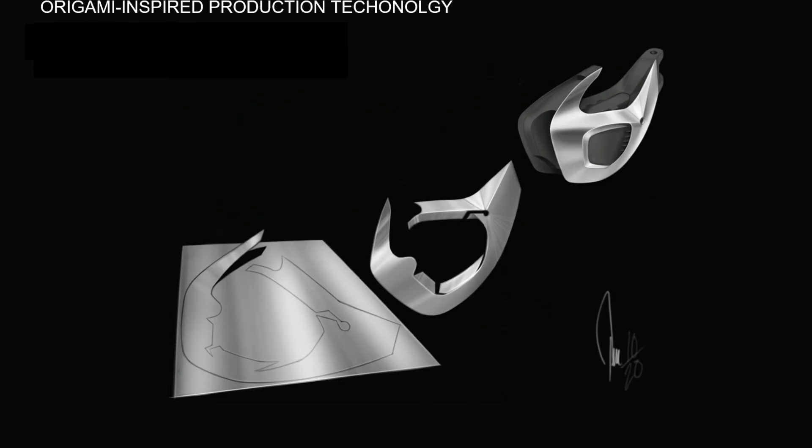And what we do, we call an origami-inspired production technology, which we envision more or less something like this. We say origami-inspired because we are folding. We take a sheet of material, primarily metal, and we fold it into shape. And we draw a lot of inspiration from traditional origami and origami research.

In some of our communication, you will see that we call it industrial origami, and this is to communicate that we are targeting the industrial scale and that sort of level of automation. However, some people who are really into origami know that you are not supposed to cut sheets when you do traditional origami. And do we cut sheets? Yeah. We are making functional products, so obviously we give ourselves the freedom to cut them. So if you're going to be theoretical about it, it's sort of more like industrial kirigami.

And for us, everything started with this. This is Stilride, which is an electric motorcycle. And this was made during the early days of this company, which is now Stilfold. And the Stilride is an electric motorcycle, and therefore you obviously want to be able to go a really long distance on a single charge. So you want a large battery and a low weight. And you still want sort of a streamlined shape to it, since you do not want to take up too much wind resistance.

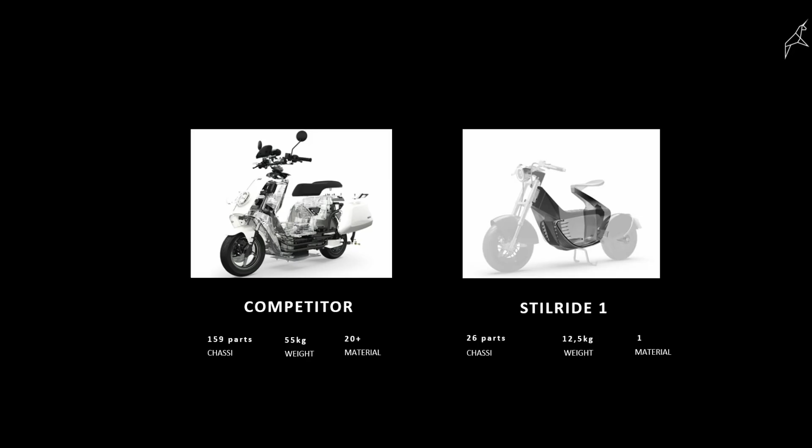So the idea here was that the chassis should be both the supporting structure and the external structure. We did not want to have an internal structure and then a cladding on top, because we wanted to have more space inside. So, in doing so, we realized that we could actually lower the amount of parts quite a lot. And of course, also, it was relatively light, even though it was made from a premium material. And yeah, the whole chassis is made from one sheet.

We made several versions of this bike, and this is the latest. And you can see that the refinement of the chassis has improved, and that is because alongside the bike, we started to develop a production technology. Because at that time, there were obviously a lot of other techniques to shape sheet metal, but none that really fitted our purpose.

Because you have traditional workshop craftsmanship, where you have people just hammering away at metal, which is great if they're good at what they do, but the level of automation is really low and it's not really good for production. You also have really good straight folding techniques, but they have a very limited form solution space.

And you also have sheet metal stamping, which is really good, has a really large form solution space, but it's very cost intense. It takes a lot of energy, and therefore it's very high volume prone. And it's because you need to make a mold for every stamping, and you need to have access to a really, really big press.

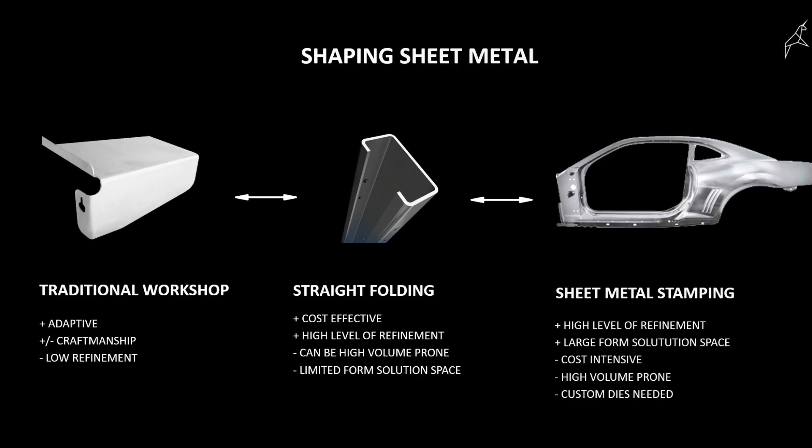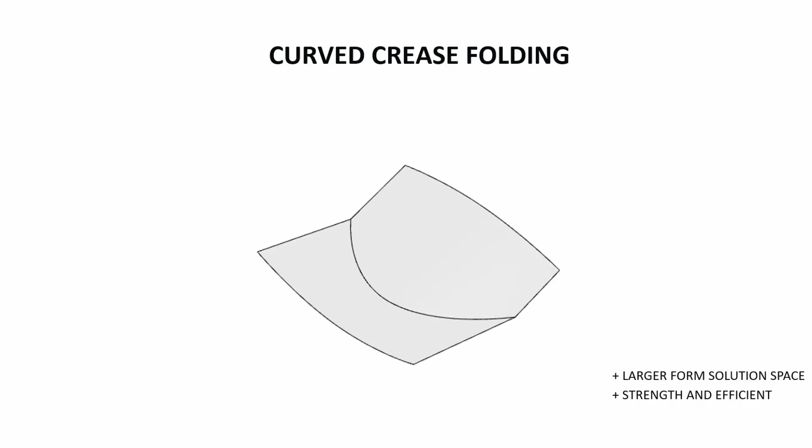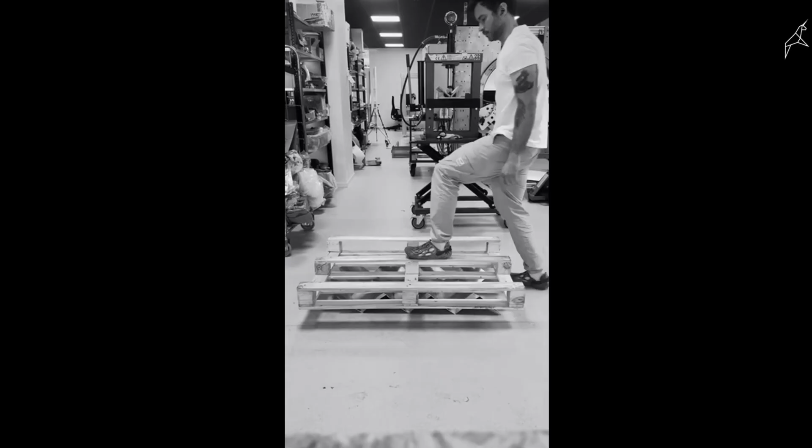So we started looking into curved crease folding. Curved crease folding has been explored in research for quite some time now, but it has had some difficulties making its way into the industry, because there are some tricky parts to it. It, however, has several advantages. Curved crease folding is exactly what it sounds like. Instead of folding straight, you fold over curves.

And when you do that, you actually also get some strength to the material. So here's our industrial designer, Ricardo, who is jumping away at a sort of wavy curved structure of 1.4 millimeter aluminium. You also get its own design expression when you're doing this, which sometimes is good for external surfaces.

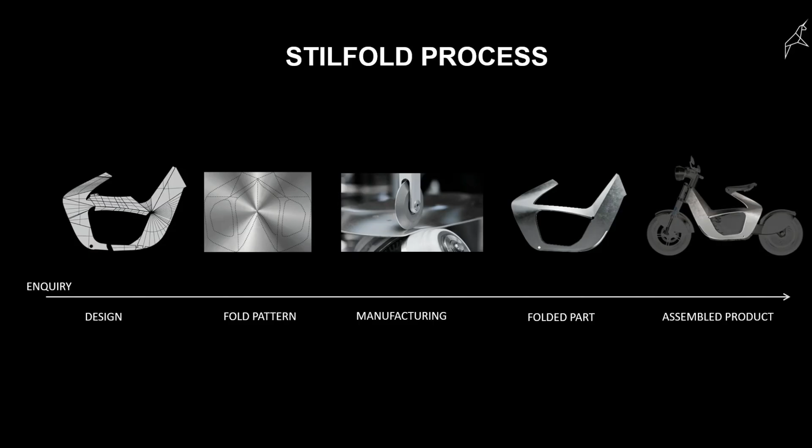And if you sort of squeeze a bit, you can say that our process is more or less like this. We have a digital design, we get a fold pattern, we put it to manufacturing, we get a folded part, and we can assemble it into a product. But in real life, of course, nothing is ever this linear, so we do a lot of jumping back and forth. Especially the first parts of the process we do several times, because we also do a lot of prototyping in other materials than metal before we go into the metal folding.

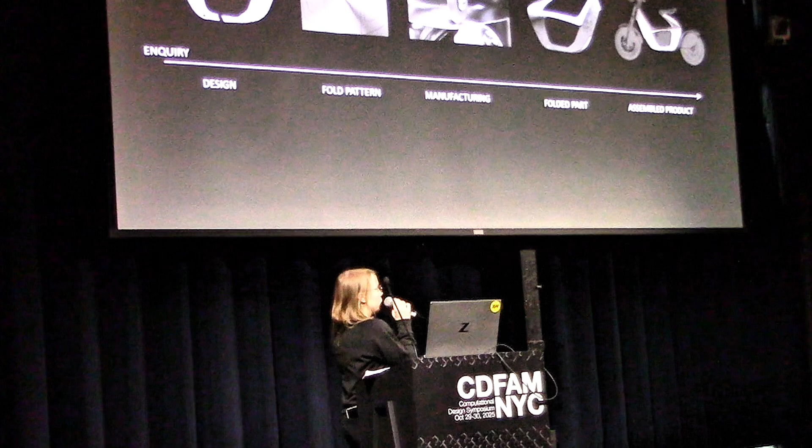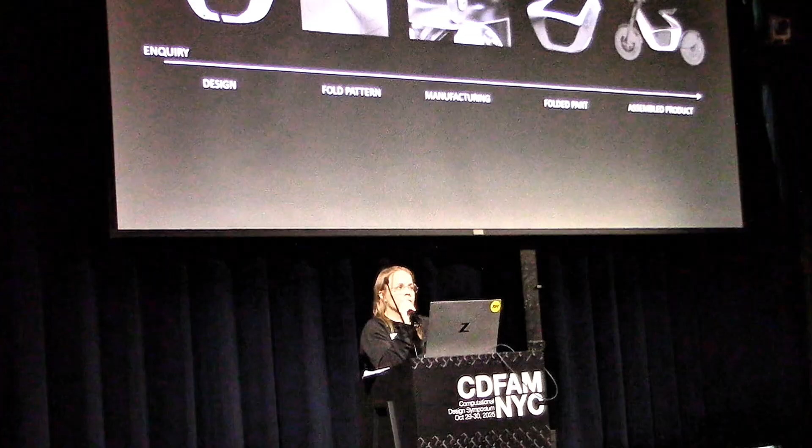What the process looks like also depends a lot on where it starts. Like, where does the inquiry come from? Because we noticed that there are many companies who are also experiencing a gap here. Stilride was our own product, but we have done a lot of projects with other companies, most of them, of course, in mobility or vehicles, but not exclusively. And we also do projects together with research institutions and universities.

We also get some clients who are only interested in our manufacturing technology, and they want to buy a machine like ours, because they have some sort of metal production already, but they want to make them in the way that we do. And we think that's great. Because our long-term goal is not to make a factory located in the north of the world from which we're going to send folded parts across the globe, because it doesn't make any sense.

So we like to consider it more as micro factories. So if other people want to buy your machine, great. And doing so, you can actually fold close to demand. And theoretically then, and this is our envisioned future, you can design a folded structure anywhere in the world and then send it to be folded close to where it's needed.

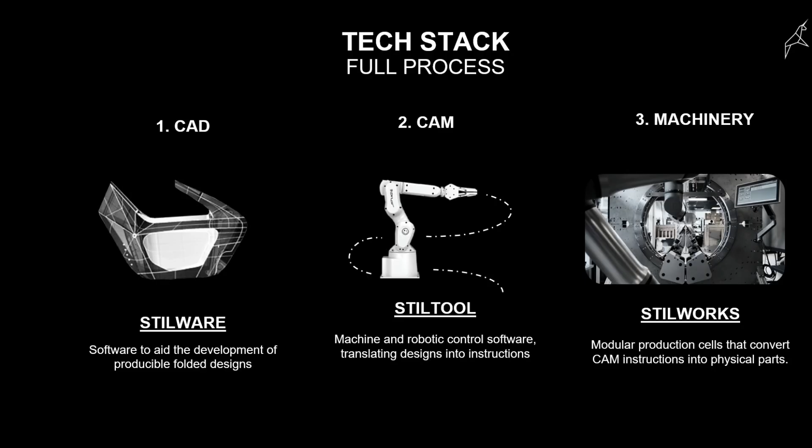However, for now, we are doing most of the process ourselves. And to be able to achieve this process, we had to develop tools for every step of the process, from CAD tools to the actual machinery to fold stuff. Because what you have to start asking yourself is, how would this look folded? Or, what does this fold pattern look like?

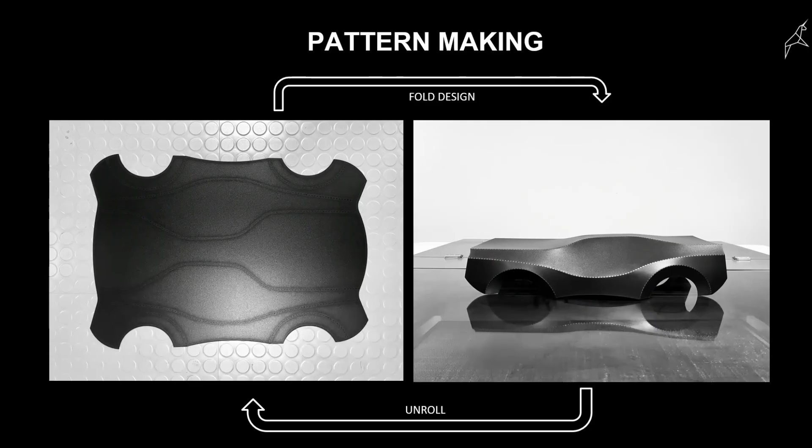A lot of our process is actually going back and forth between a 2D fold pattern and a 3D structure, to ensure that we can make this fold pattern and that this 3D structure is delivering whatever is needed for this product. Because we always have a specific function in mind. We unfortunately don't do art, so we have very precise requirements. To do so, you always have to rethink the geometry from scratch. Because even if you have a part which looks like it could be folded, you will have to rethink it.

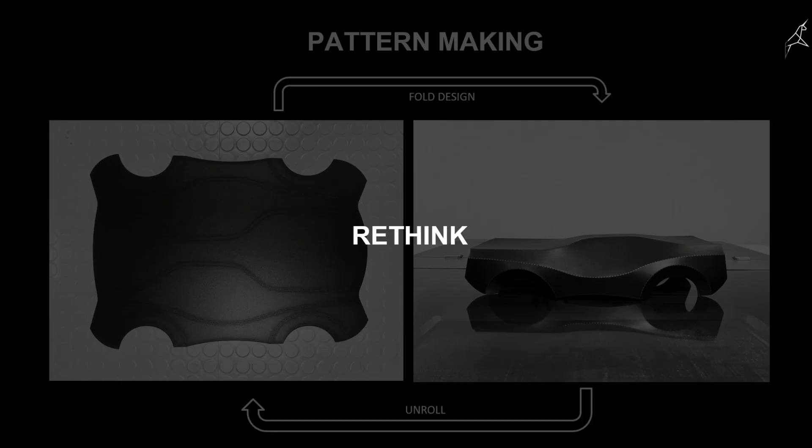Because as some of you know more than others, we are working with folded developables. And folded developables are made out of developable surfaces. For those who haven't worked with developable surfaces, that is a surface that you can make flat without distorting or cutting into it. Developable surfaces also have zero Gaussian curvature, which means that you cannot make shapes such as spheres or domes. And you can usually categorize developable surfaces into different types depending on what the rulings look like, and the rulings are the lines that go across the surface here.

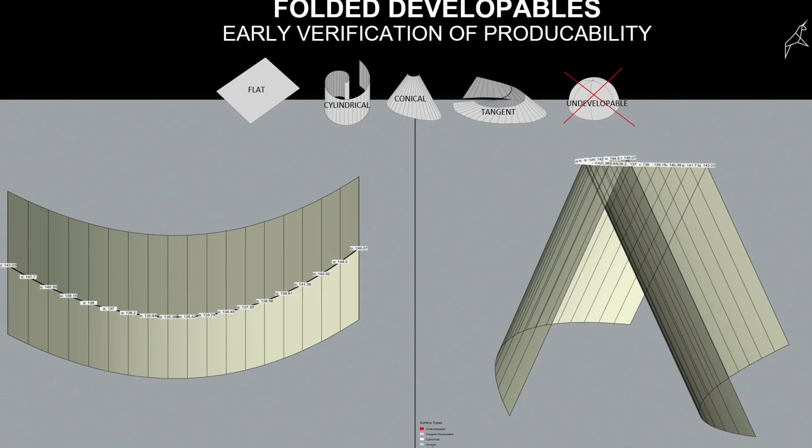Here you see this is a very simple geometry in one way, because the requirements are quite straightforward. It needs to have a flat surface on top because it needs to land somewhere, and you have to meet the ground, so naturally you will also have to have some sort of flat surface underneath. But you need to connect the two with some sort of curve, and then you get this. Here you see that the green areas are flat surfaces, and the yellow areas are cylindrical surfaces.

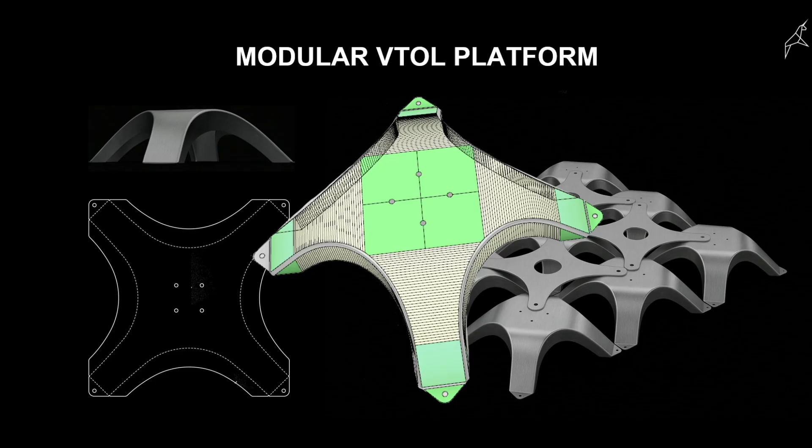And this way of thinking, that this is this kind of surface and that is that kind of surface, is not completely straightforward. We have in-house industrial designers who learned this way of thinking, but most people do not have it; it's not built into us. And we do want this to be widely spread. Here we have the platforms on our workshop floor just after production. And to the right, we also made a topology optimized version of this together with Toyota Labs, just to try it out.

But as I said, to think in this way of a network of developable surfaces is not super intuitive, but it's crucial for making this kind of objects. So we had to develop a set of tools to either model developable surfaces straight away or analyze geometry afterwards. So either you can think of it in terms of surfaces, or you can focus on controlling your creases.

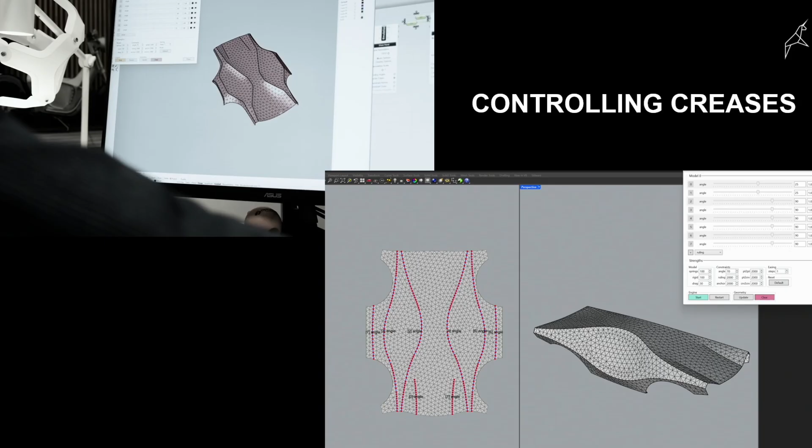And what I think is most interesting about this, from my perspective, is that this actually is a lot of a UX challenge: how we communicate what you can do and what you cannot do in such a way that designers can sort of know how to react to it. So yeah.

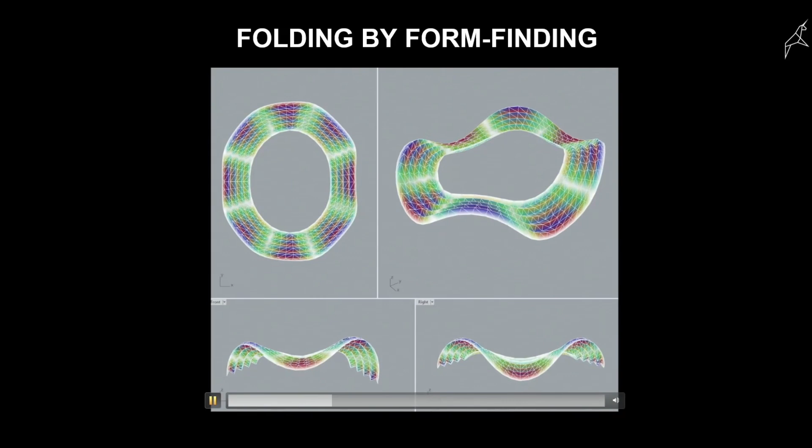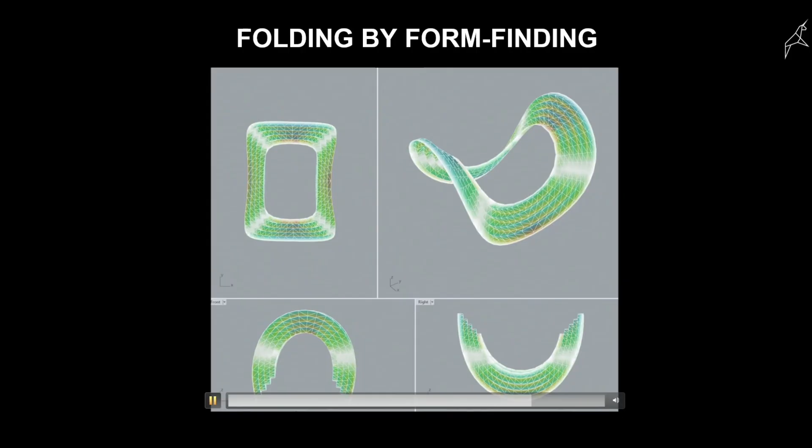In some situations, some forms are not that easy to model. So then we do also fold by a sort of form finding process. And that's good for situations where you either need a very rough early estimation of what the material would look like, or when you're going to make shapes like this, because in this case, you would probably not expect this to be the outcome if you make this kind of folds.

However, when we fold in this way, we might get some double curvature into the structure. So then we will have to have a layer of analysis on top to show whether we can produce this or not.

Because through the projects we have made, we have discovered, or I mean, it might be sort of obvious, but it has really been confirmed to us that how we place our creases and the exact disposition of them, like the curvature of them, matters a lot for the performance of the structure. And in that process, our designers are actually crucial to place the curves.

We, like the rest of the world, obviously, are working on integrating prediction into different parts of our process, but as of today, our industrial designers are still the drivers behind this process. And what we need to establish as early as possible in the process is, can we produce this? Because we do not want to waste a lot of time on something we cannot make.

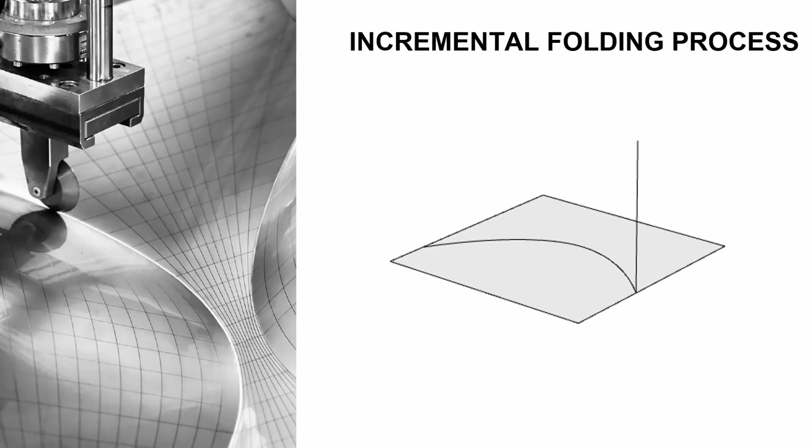Because we have developed an incremental folding process. And incremental folding is also an area of research that's been around for some time. And we have adapted it in this way, that we have sort of a wheel which rolls across the surface and presses the surface in a point along the curve. And then we do this in a number of passes until we reach the angle we want.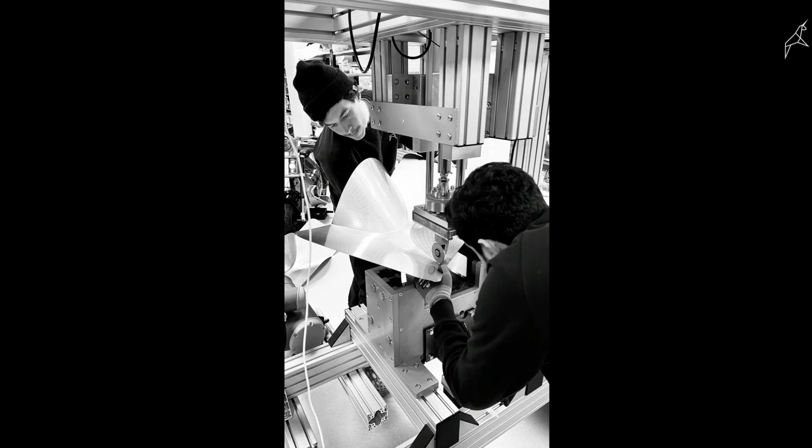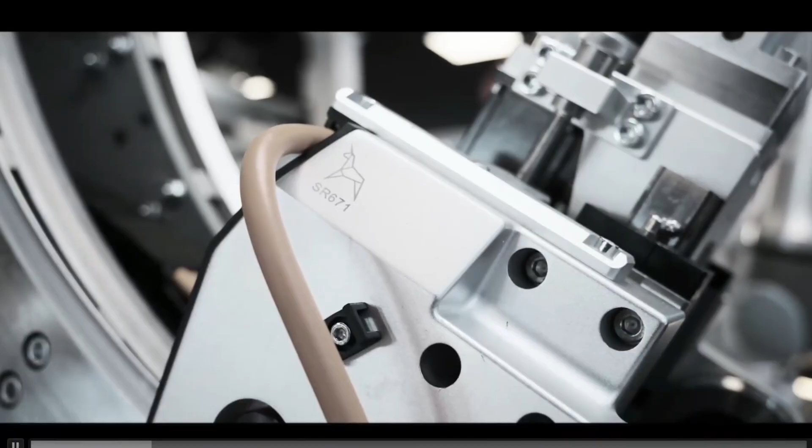And to do this, we have built a set of folding machines. This is an early folding machine, which was sort of manual, you could say. And this is our latest folding machine, which has a bit of a higher level of automation. And here you can sort of see how the wheel presses down on the surface, and you have cones underneath which roll, and then you get the shape.

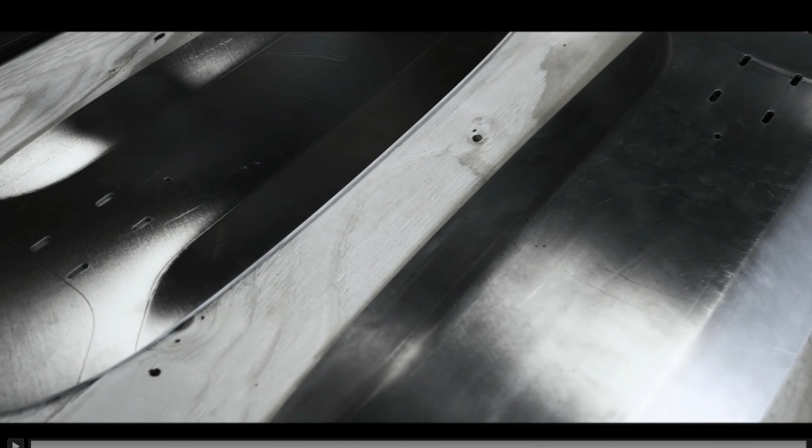And we are currently in the process of planning our third folding machine to increase both automation and the size and precision.

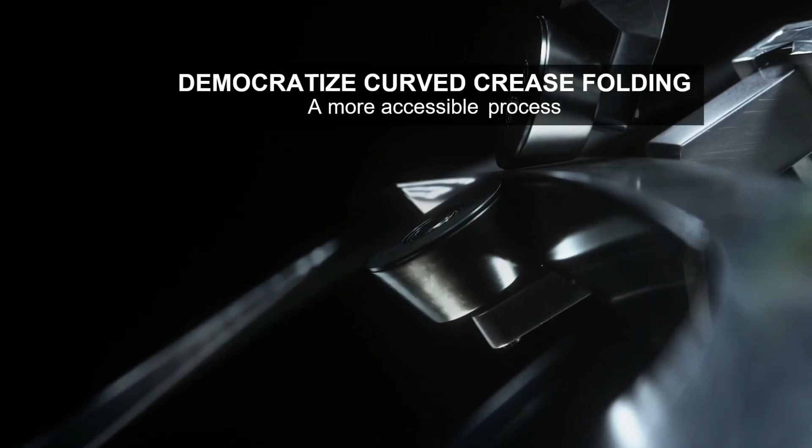Okay. Yeah, but to wrap this up a bit, what we are trying to do here is that we want to democratize curved crease folding. And by that, I mean that we wanted to make it a more accessible process. But to do so, we do rely heavily on software, and we will continue to do so forever, probably.

Because we do need a really high level of automation in the actual production if we're going to have this situation where people are producing anywhere across the globe and we cannot control it. We do also have to put a lot of emphasis on the user experience, because it's not feasible to have the situation where designers have to train for years to be able to learn how to design in this way.

Because we think that this production technology is actually a good, greener option to form metal sheets, because you can reduce parts, which simplifies the whole chain. Since you build some strength into the structures, you can also reduce weight. But more so, since you do not try to push or press the whole sheet, you can reduce the material usage quite a lot by simply paying a lot of attention to where you place the curves.